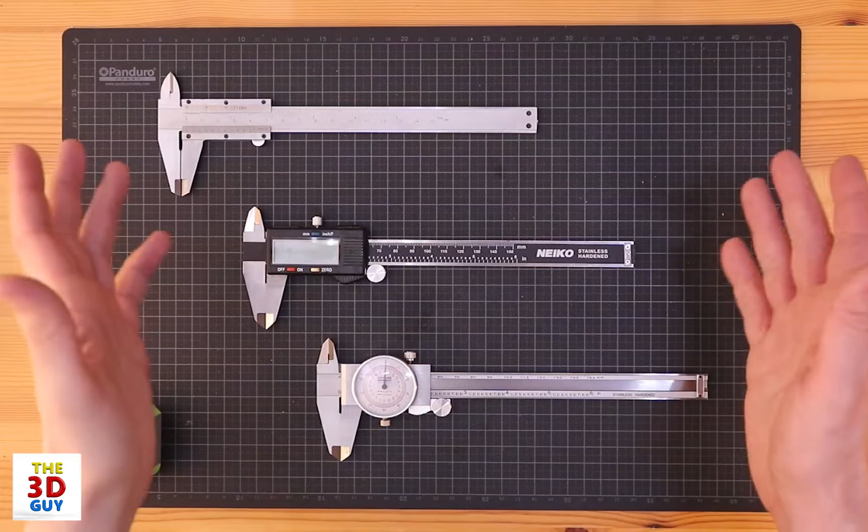So first and foremost, let's get this out of the way. Calipers is a very broad term. These specifically are Vernier calipers: a standard vernier, a digital vernier, and a dial vernier. Functionally, each of these pieces are used exactly the same, they function exactly the same. But how you read the information on the dial, the digital screen, as well as this analog area, is very unique. So we'll take some time to go over each of them, and then show how you use them with this little sample piece.

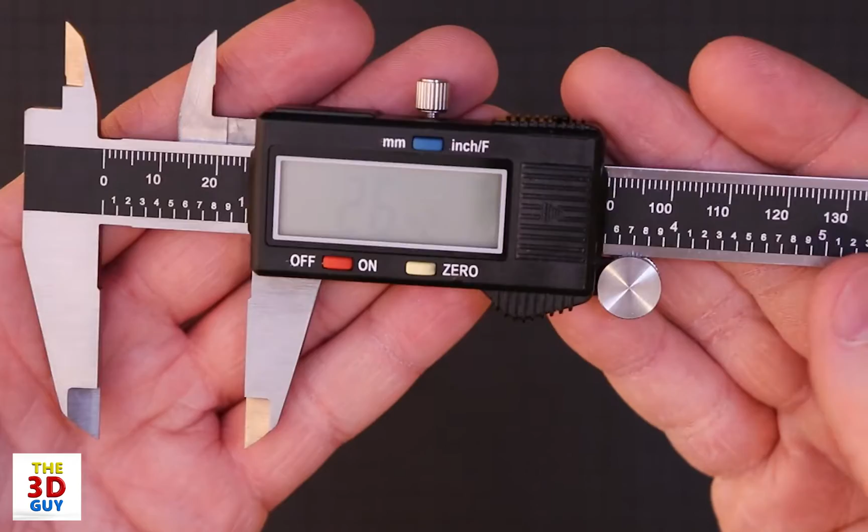One of the great things about digital is it's simple to read, though in this case it's a little hard because my battery's pretty low, so sorry about that. This is currently in millimeters, and we've got 26.48 millimeters. The nice thing is we can just change that right here, click inches, and right there we have 1.04 inches. We can click that again, and we can get a fraction, 1 inch and 5/128ths, and click it and it goes back to millimeters. Really nice. To zero this, you just go to the zero position and click 0. So very simple, very straightforward. You do have these measurements you can use, but it's not really necessary. So that is it.

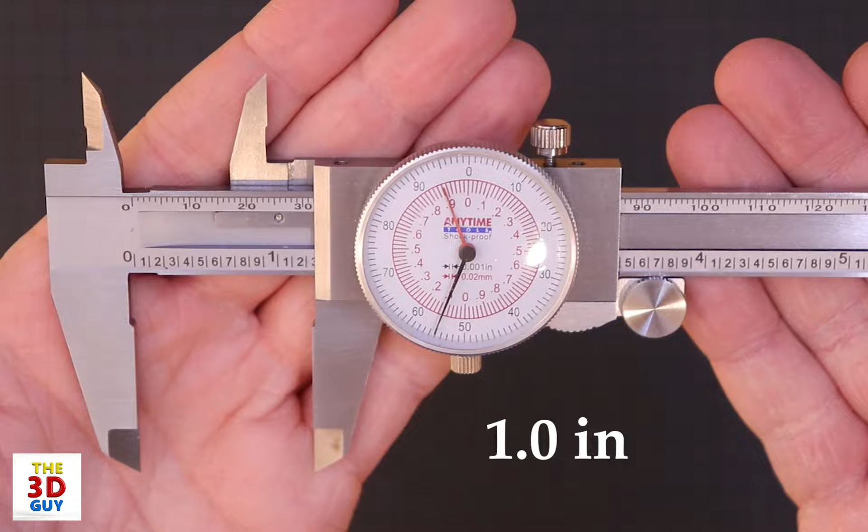We're just going to freeze this image on a random measurement. And right there, yep, we can be measuring in both imperial and metric. So you can see for the inches, we have 1 inch and some points right there. So we're going to go 0.1, 0.2, and you can see a little bit of the 3, but you need to see the whole thing in that little line afterwards. So we know it's 1 inch, 0.2, and we're going to then move over to the dial. You can see we have the major measurements of 10, 20, 30, 40, 50, and the minor measurements in between: 50, 1, 2, 3, 4, 5.

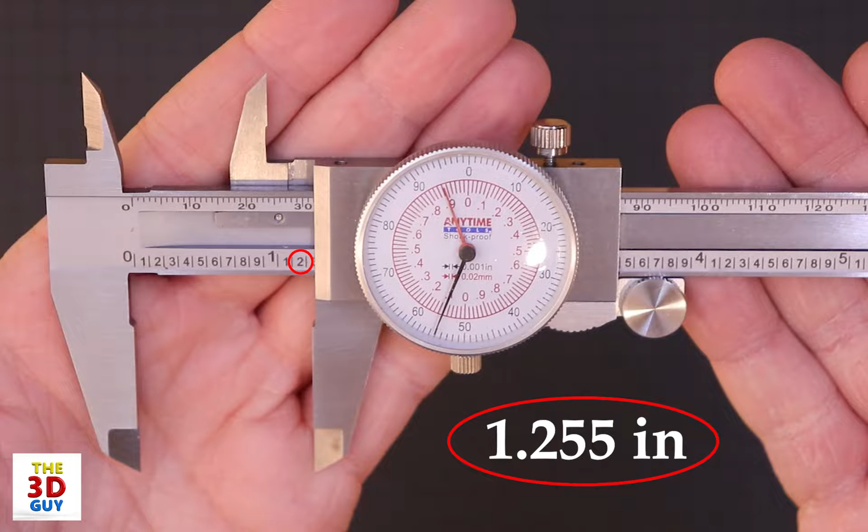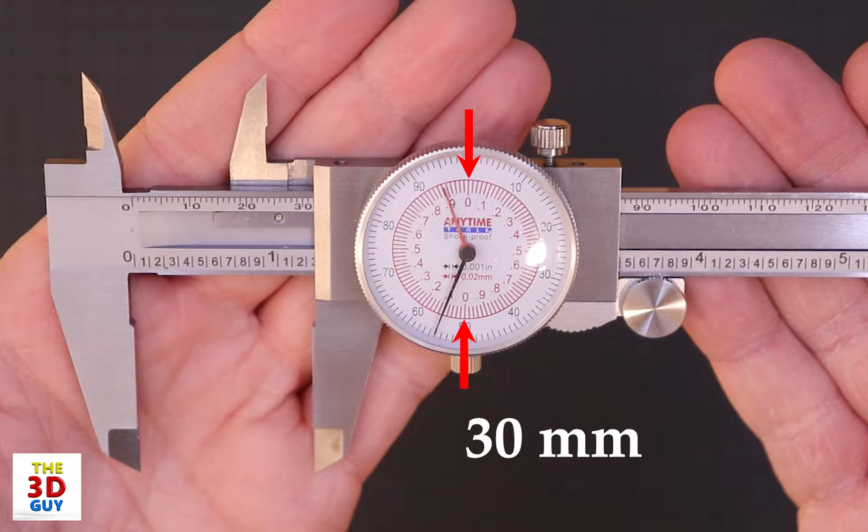So we can see the full measurement is 1 inch, 0.255. Now for the metric, it's the exact same situation. We can see it goes up past the 30, and we have 2 more past that, but not quite. On the dial caliper, it's a little different with metrics because 1 rotation is actually 2 millimeters. So we're looking at the fact that it's not quite past, it's just shy of that line. So we have 31.9 millimeters. It looks like it's pretty much right on the dot, so it might be a little bit over to the side, maybe 31.89. It's somewhere right in between in this case.

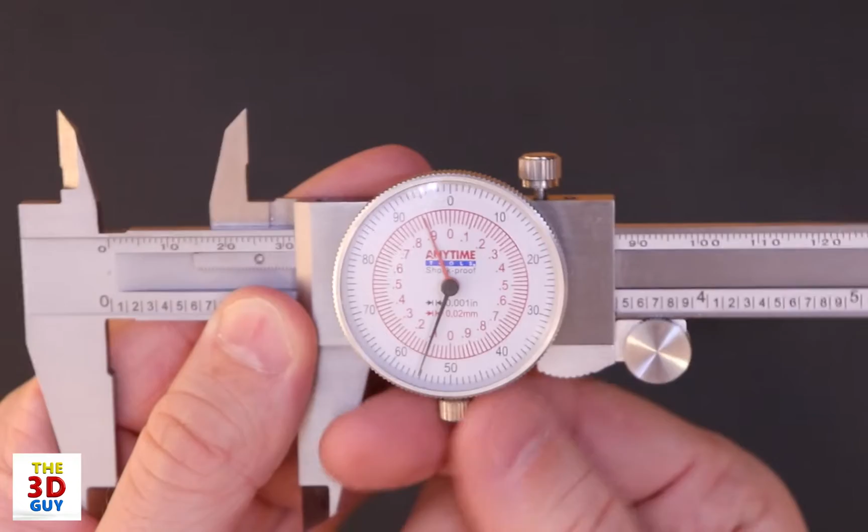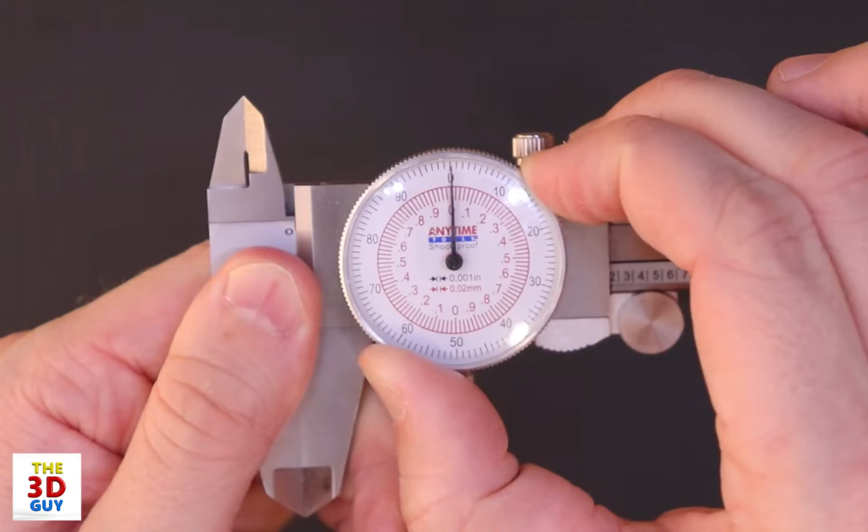One thing to note: if you want to zero this, I'm going to unfreeze the video real quick. If you want to zero this in, you just loosen up this dial. We're just going to close it up, and you can see it's zeroed. But let's say something happened and your dials are now off a little bit. You can just rotate this and then lock it in place and create a new 0. So that's something to keep in mind. But I'm going to put it back because it actually looks great how it was. And that's that. That's how you use dial calipers.

All right, first off, in the far right, you can see in the bottom corner, you have 0.05 millimeters. That is the tolerance, the amount of tolerance you're going to be able to get with this pair of calipers. And then in the top right, you can see it is 1/128th of an inch. So both very high, minute measurements to be quite specific. So with the millimeters first, we're going to start at the 0 on the Vernier scale.

And that's going to tell us a lot about the major measurements for this measurement. So we can see that it is 3 centimeters, so 30 millimeters, and it goes up to 38. We don't quite pass the 39 millimeter mark. So we're at 38 right now, and we're going to write that down.

Now we're going to use the Vernier scale to figure out which one of these dashes lines up with the dash above. In between you have 1, 1.5, 2, 2.5, representing 0.1, 0.15, 0.2, 0.25, etc. We're going to keep moving along until we find one that lines up. If we look at 0.45 and 0.5, they're pretty darn close, but I think 0.5 is actually the most accurate, so we're going to go with that. Now writing that down, that gives us 38.50 millimeters, and that is going to be the millimeter measurement.

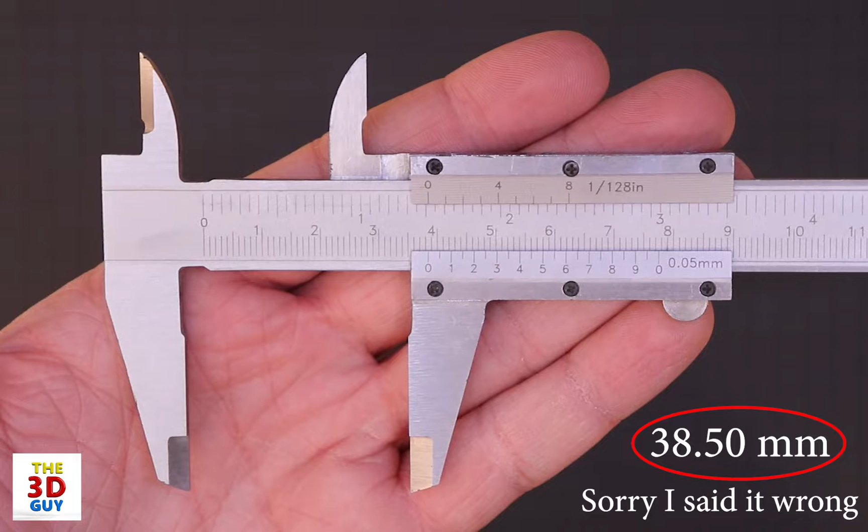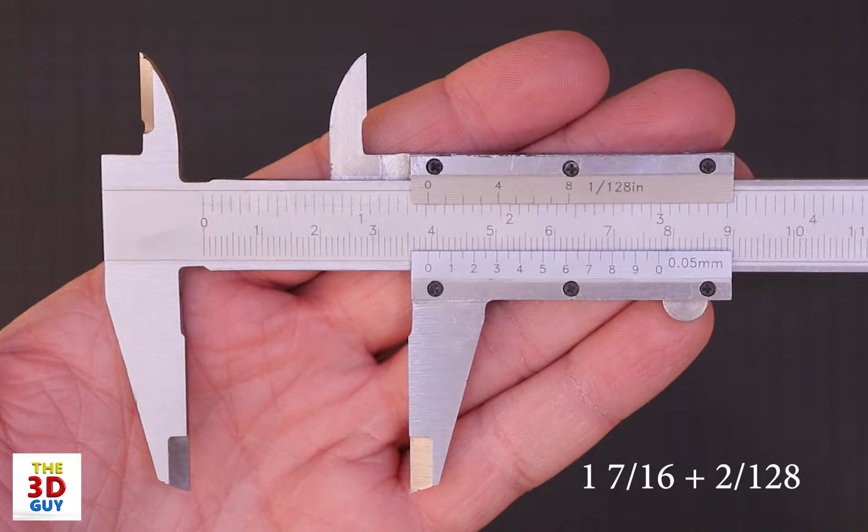Now next, on the inches, very, very similar. We're going to use the 0 mark to find out where we're at. Each of those dashes is a 16th, so we have 1 inch, 1, 2, 3, 4, 5, 6, 7 16ths, and now we just got to line up that dash. So we're going to look around, and honestly, it looks like the second dash. And so that is 2/128ths. Now this is where math gets a little bit hairy. If you don't like fractions, sorry, the imperial system is a bit different. So we have 1 inch, 58/128ths of an inch is how you would measure that. So that is how you'd use a standard caliper.

Okay, so we're going to use this dial caliper and this little 3D printed piece to talk about the different functions and how you would actually pull measurements with a pair of vernier calipers. I would normally use the digital one, but it's actually kind of out of batteries, so we're just going to use this guy, which is also my preferred one.

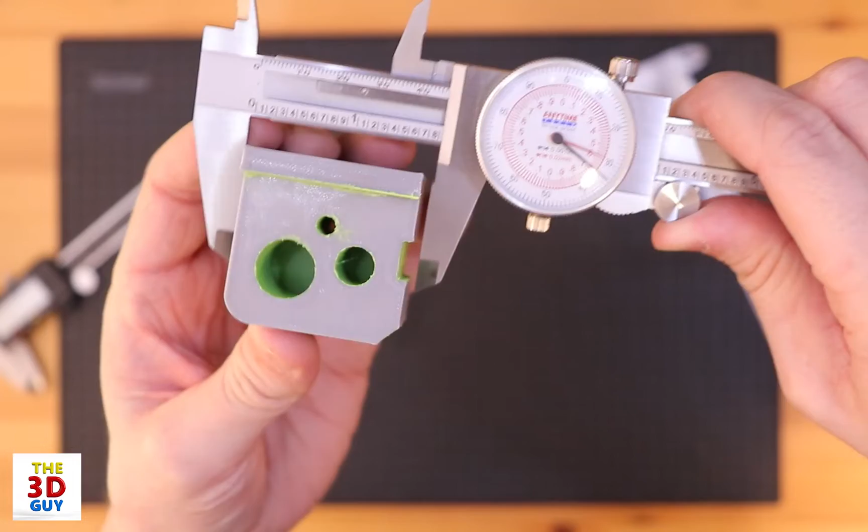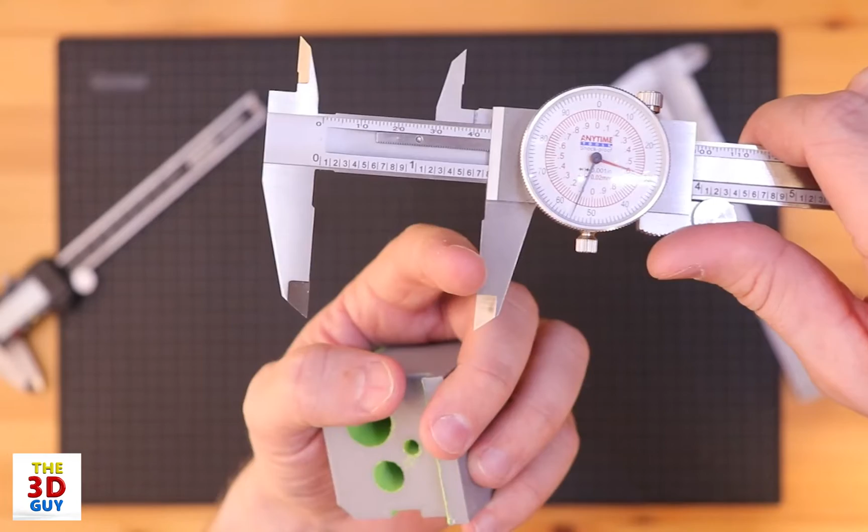Okay, first off, we have the main measuring teeth right in here, and it's quite simple. You can just put something right in between and push together and measure. If you wanted to, you can lock it so you have that measurement. Something to make sure you get right: if you look closely, let me pull it out, these drop down a little bit in these little grooves right here. Make sure you're not measuring from here to here, but here to here, because these are the measurements you're looking for. So from that, we were able to see that this is 1 inch, 0.55.

That's kind of nice. We can also use these edges right here. I'm going to unlock it, and I can actually check the diameter of this hole. You can see right there. I can pull that measurement from there.

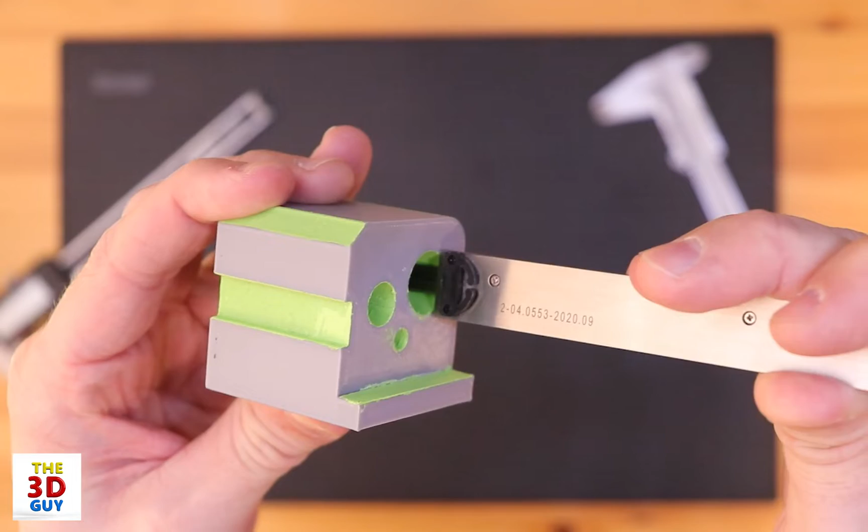Next, we actually have all the way on this end. This was the third feature that I learned how to measure from. Honestly, it's really nice. So we can actually see how deep a hole is. In this case, we just put it all the way to the bottom, push it down, pull it out, and now we can see that measurement.

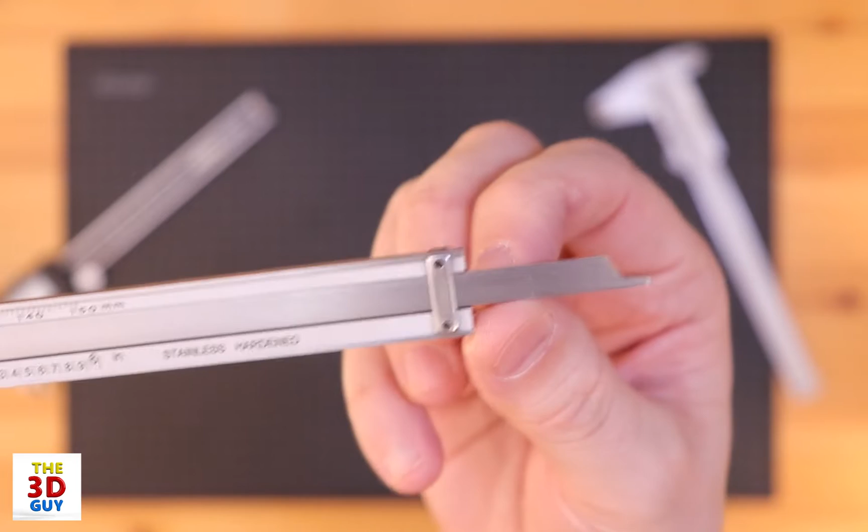Really, really nice. Depending on the caliper, some of them are a little bit wider, some of them are a little bit thinner. I like them thinner because if you have a smaller hole, it is able to fit. If not, it doesn't really work for you, so it's a little limited there.

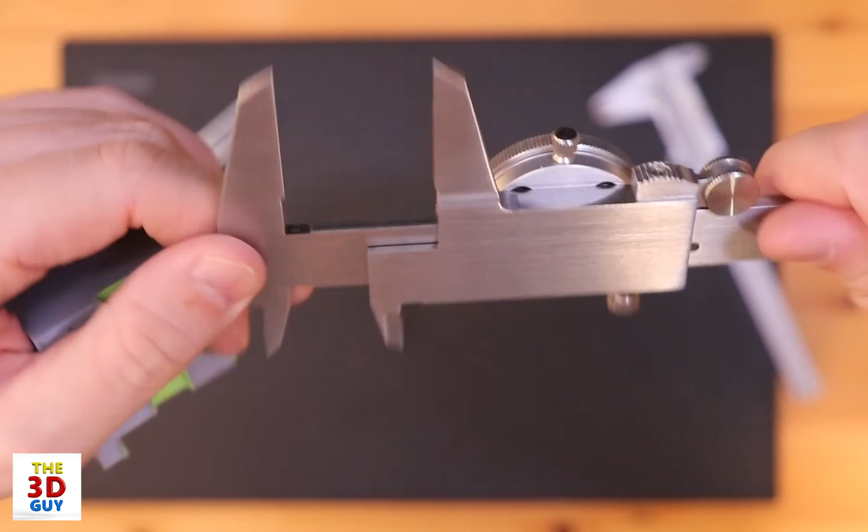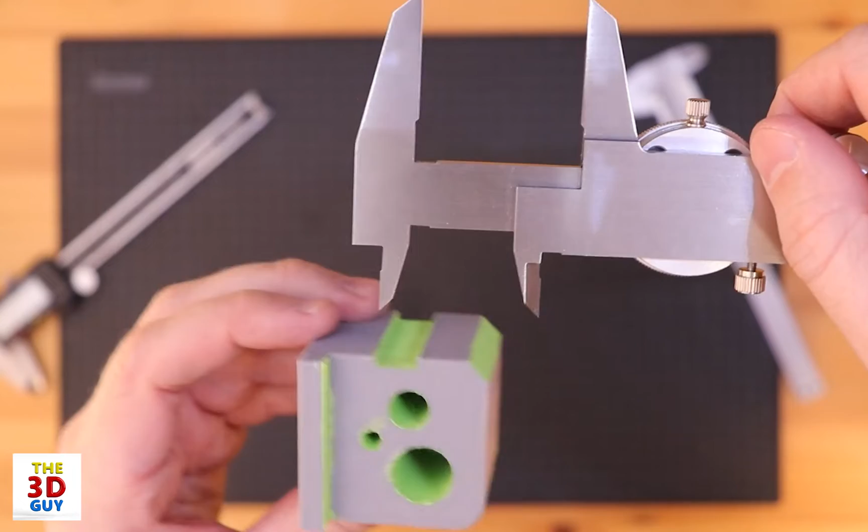And last but not least, you actually have the back side. This edge right here is also something that I've seen being used, which actually kind of surprised me. I used these for years before I actually realized this was an option. But you can go back, and we'll see if I can get this to work. You can see it's resting right there. And then I can push this right up to it, and I can get that measurement. You can see if I can put it next to it and see. It lines up right there. And so we have that measurement there.

If you want to just check by looking at it, you can, but it's never a good idea to eyeball it if you can avoid it. I mean, you have a precision tool, you might as well use it as a precision tool.

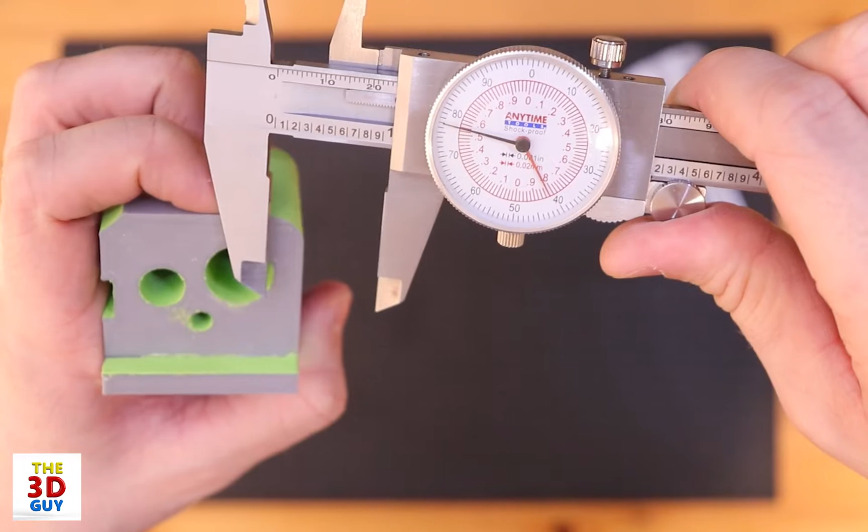So there are some other things on here you can see. I have fillets. Fillets are kind of hard to measure, so for me, I do eyeball fillets sometimes. You can kind of see a little bit better with this line. I will line things up and then just kind of eyeball the radius. It's not preferred, but that's kind of what I tend to have to do in some cases. Same with a chamfer if you're doing something like that. But again, usually you don't need to. This is something that's meant to be giving you accurate measurements.

So let's talk about the prices and the pros and cons of each of these, because it is a little bit different, and it really boils down to preference for many of them.

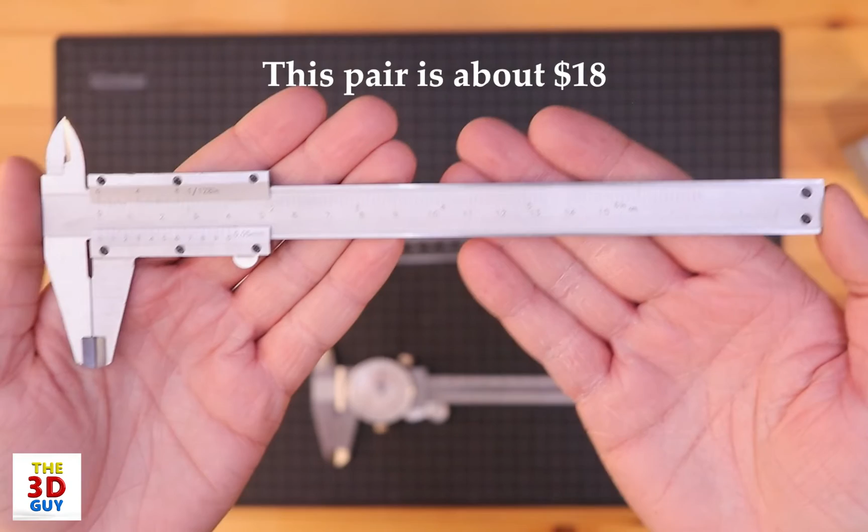All right, so what are the pros and cons of each of these? Let's start with the standard. Pros: they're accurate, very very accurate, assuming you can read it accurately. They're also usually the cheaper of the three options, so they're frequently found in schools, and they are the original of these three, came out much earlier. So very nice to use. The biggest con, though, is they're kind of complicated. If you don't like doing math with fractions or small decimals, it's a little more intensive learning how to use these. That's my biggest issue with them.

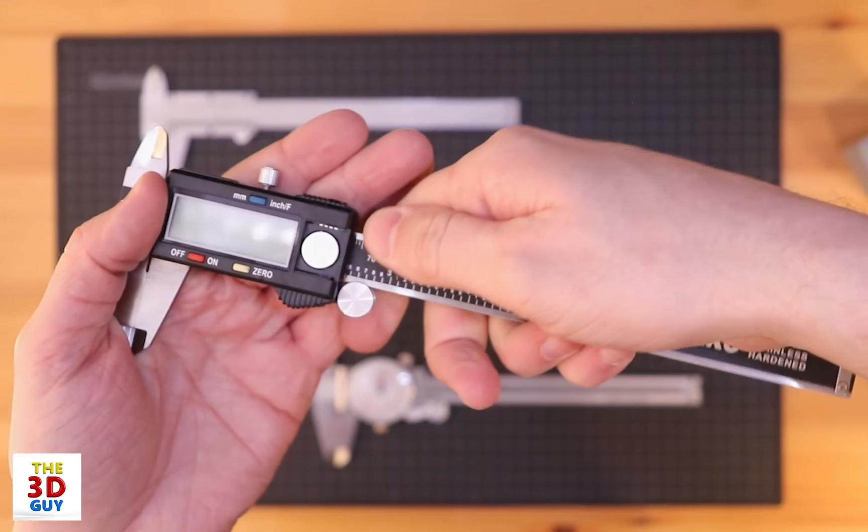Next, we have the digital. It's simple, really easy to use, which is great. You can get the measurements instantly in metric or imperial fraction, which is really nice. They're a little more expensive, so that's a con. And I think the biggest con, which you may have seen in this video, is they're battery powered. So if you run out of power, you're kind of screwed unless you have a spare battery. They usually charge off of these little batteries right here. That's my biggest issue with the digitals, and I shouldn't have opened that because now I can't close it.

All right, last but not least, we have the dial. I personally like these a lot, partially because that's what I've been using mostly recently. The nice thing about these is they're also very accurate, oftentimes with the same accuracy as the standard, but they're easier to read. One of the biggest cons, though, is they're usually the most expensive. So it just depends on how much you're going to be measuring and using these. I use mine all the time, so I eventually just justified buying a pair like these. So that is that. There are a lot of pros and cons to these.

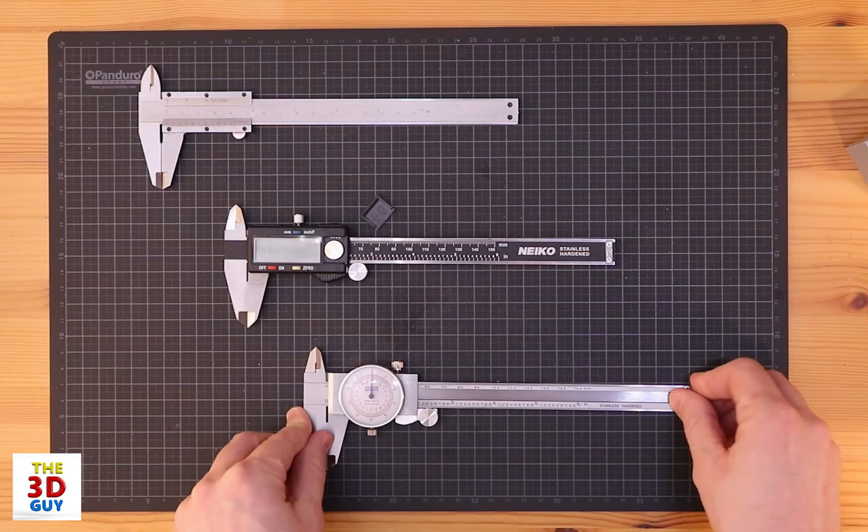Also, plastic—I personally don't like plastic calipers. There's a few issues with them in terms of heat or bending or warping if you're adding too much force. But for some people, if you're working with something you don't want to be scratching, like a watch or jewelry or soft stones, then maybe these aren't the best because metal will scratch, and a plastic one might be more preferred. But for me, I'm usually working with 3D prints and other plastics, so I don't really mind using the calipers or even just other metal.